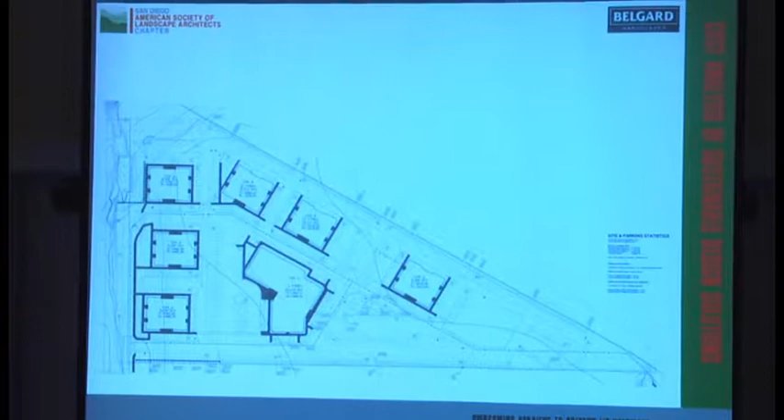And that project was this project. We thought, if we can take this project that was designed with very traditional methods, traditional materials, traditional approach to addressing stormwater management, and put together a group of people to look at it in a different way, maybe we can come up with a better argument.

So in October, the Stewardship Committee put on a really fun, interesting event - probably the most fun any of us have ever had. We put on a charrette, a design charrette.

We put on a design charrette where we invited landscape architects, civil engineers, landscape contractors, and landscape architecture students to gather together, similar to what we're doing today, except in a different venue. We broke up into 5 teams, each with at least one person from every discipline, and had this brainstorming design session.

Out of that came some slides that I'm going to show you. It was actually very interesting, the solutions they came up with.

We looked at the best designs. By the way, they only had about 3 hours to come up with this design. This project is about 11 acres and has 7 buildings on it - just thought I'd count them out for you in case you couldn't see it.

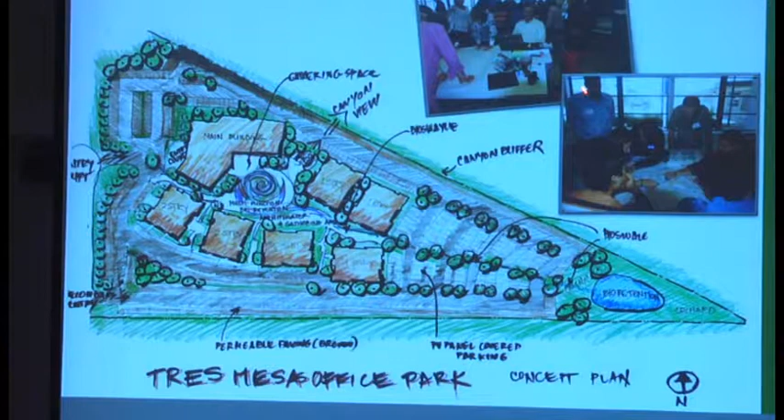And here are some photographs that give you the thrilling experience that we had. One of the designs - they all had interesting solutions. These were all done with manual drafting tools - I'm kidding, it was all freehand.

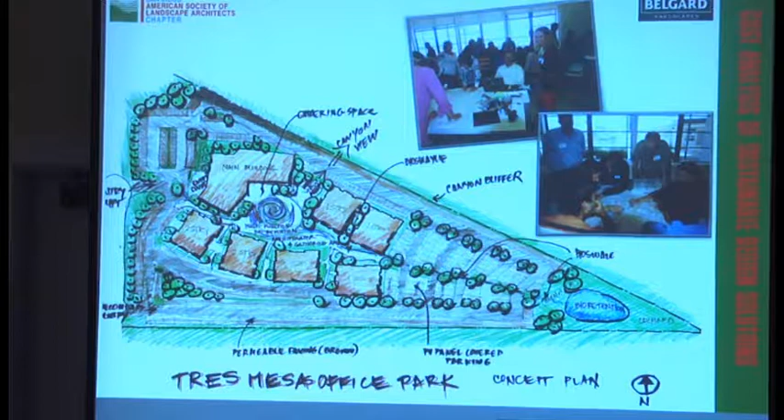They were just learning. Another project, we had 5 solutions. This is an image of one of the teams working on the design together. This is an image of that project being presented.

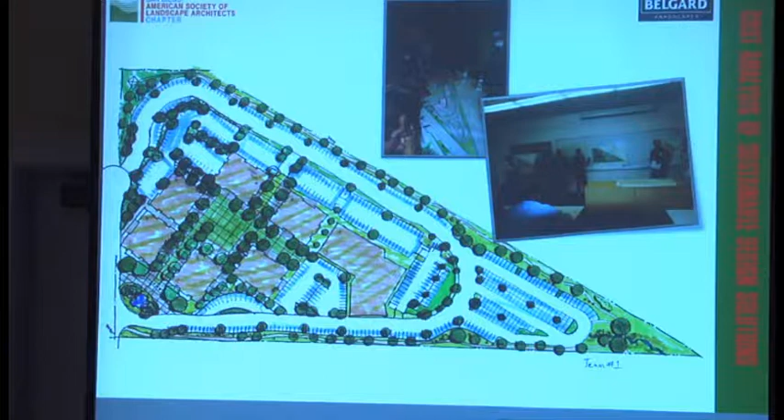We took out the slides that showed people fighting - there was a lot of that, it was a little embarrassing. Some of the solutions showed more detention basins than others.

Oh, I'm going the wrong way.

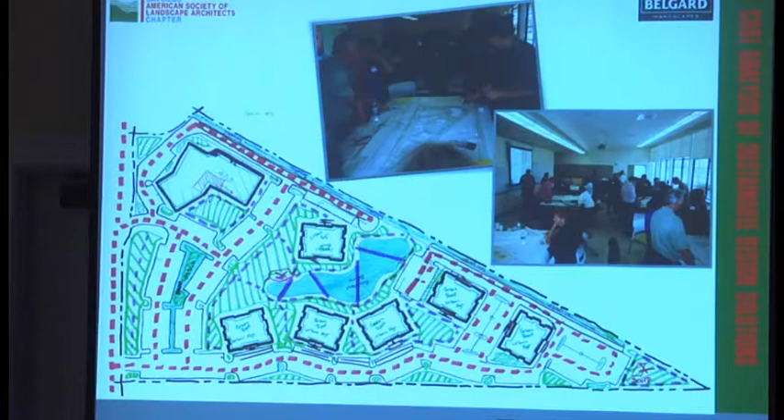This particular project, which is the one most similar to what we ended up going with, had permeable pavers going through the courtyards, creating a nice little space between the buildings, and going across, taking the water into this bioswale here and to a larger pond there. From these, we came up with this design.

I'll interrupt myself for a second to tell you that this study we're doing is just the beginning of many cost analysis studies. Because we're going to look at so many different aspects of sustainable return on investment, we thought we'd break it up into manageable increments so we could get the information out to everybody. So we looked at paving.

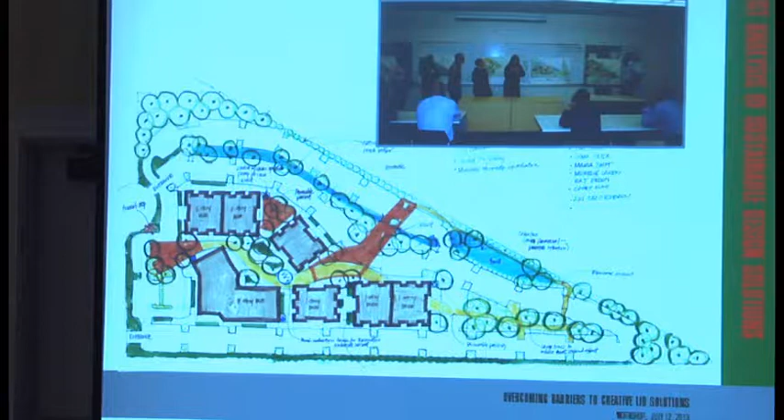Much like today, Belgard helped support that event. They gave a nice lecture at lunchtime, and after hearing everybody's presentations, they shared what could be done if the whole project had been done with permeable pavement. Remember this project here - I'm not picking on it, because it was actually the one closest to what we went with - but most people thought permeable pavers are more expensive than concrete or asphalt, so we need to use them sparingly. You'll find in the rest of my presentation that's actually not the case in many cases.

So they showed us that we might want to look at using permeable paving on the entire parking lot. I'll point out that as everybody was quickly developing their plans, they quickly discovered in that 3-hour design period how much the parking dictates the entire project, if they didn't know it already. Some of the projects didn't meet the parking requirement - they were really nice designs, but they fell a little bit short, so we couldn't use those.

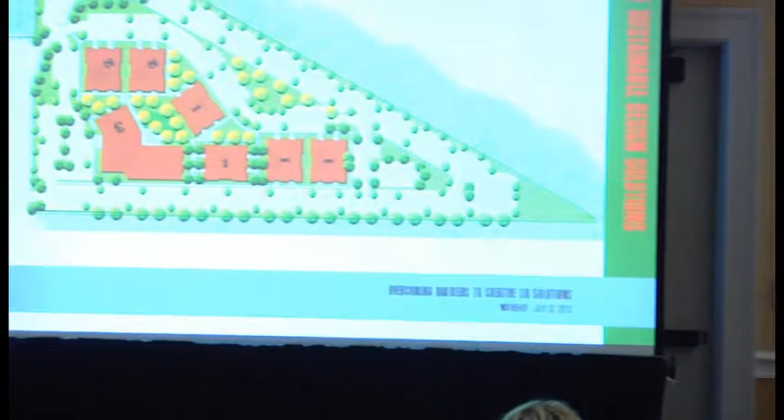So this project here, clearly from a sustainability point of view - and this was not just about cost analysis. I think we all know sustainability is about not only economics, but also the environment and social well-being. Part of social well-being is how do we create spaces that bring people together, spaces that allow people to appreciate the landscape? So this and some of the other designs created a nice little courtyard in here. Even if you have to park down here, well, at least you get a little bit of exercise and can walk through a nice landscape.

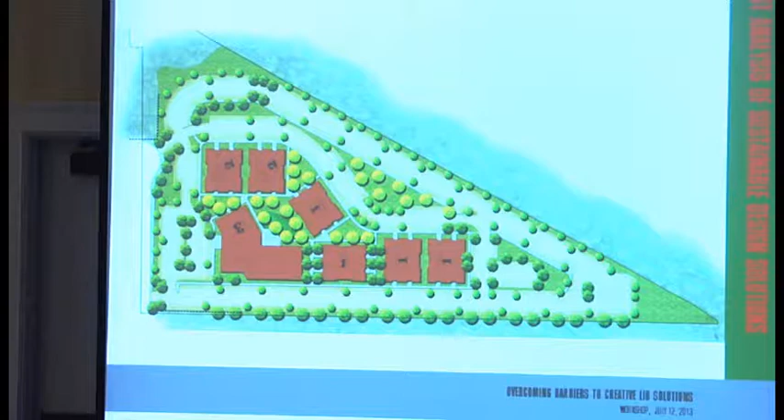So with that, I'd like to talk about the numbers. One of the reasons I'm presenting right now, right after the break, is because the next 4 slides are just numbers, and I was afraid you'd fall asleep if I put this at the very end.

So remember when I said I could cry easily? If I see somebody sleeping, man, don't do that. It'll just send me over the edge. So I'm not going to bore you with all the details, but on this one I want to go over each line item.

The first line item is asphalt paving and curb and gutter and the ribbon gutter. So you'll see we have a unit cost of about $4.65.

I'm going to interrupt myself again because I forgot to say something important. Putting these numbers together, we worked with Seth Seaton from Belgard and John Coffey from Coffey Engineering to put some of these numbers together.

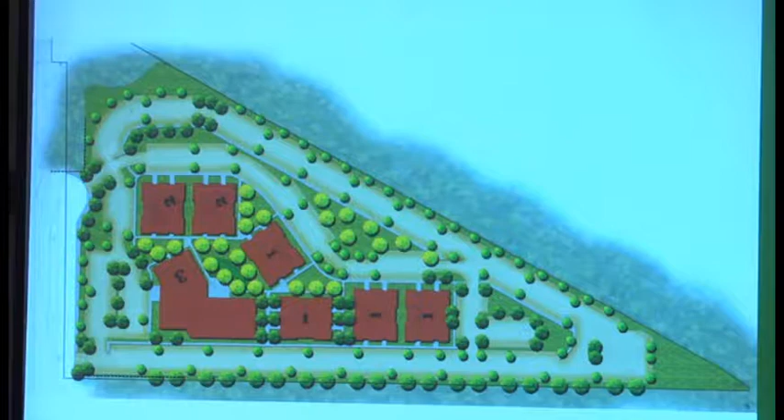I bring that up because how many of us, especially the landscape architects, wish that we could be involved in the project earlier on and brainstorm with the civil engineer before they get too far down the path of no return, because they don't want to redo the design based on our comments. The client doesn't want to pay them to redo it. We don't want to point it out to the client that we think it could be done a little bit better, right or wrong, because we don't want to make the civil look bad. And the civil doesn't want to make us look bad. So if we're all together in the beginning, it will make a much better project. And even though the client may think that it...

Thank you. I think everybody in here would agree, but I don't know how many... Do we have any developers here? We did invite some. Dang, I was really hoping they'd hear that, especially the applause.

But we need to get the word out. So you civils that get hired right away, when you're talking to your client, talk to them about how valuable the landscape architects would be coming to the table right away, and how it might be more money in the very beginning. I've already diverted from my presentation, but I do that anyway because I've got the microphone—it takes longer for you guys to shut me up. But we think it will save the client more money in the long run. It's going to be more money in the beginning, but not only will it save them money, we think it'll be a more creative solution. I'm not discounting the civils—they have much better knowledge than we do of the technical aspects, but we need to be working together.

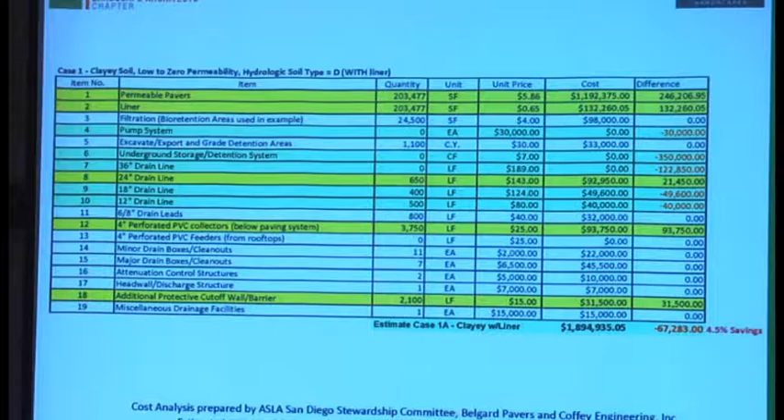Before I go over these details, I want to point out the reason we've done this: we're going to have this on our website. We want it to be a place for everybody here, anyone in the country or the world, to go look at a scenario that might closely resemble what they're dealing with.

We understand that some of the line items on these spreadsheets may not apply to your project, but it's a general checklist of things to think about. On your project, if you see similar things, you can latch on to those. The things that are different, you'll understand how to interpret. One benefit is it gives you a head start in thinking about it.

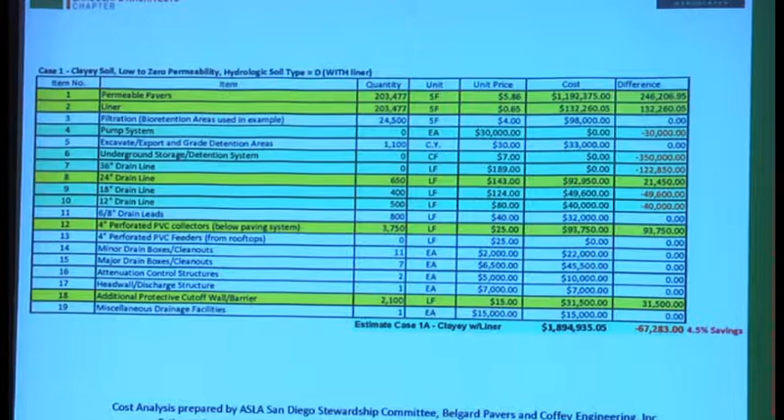Is it worth taking the time, especially with whatever fee you've been given, to look at the viability of permeable pavers or permeable pavement? Pavers aren't always the answer, but is it worth spending that time? I think you get the idea.

I want to say again, I can take the criticism. If you want to critique the heck out of this, we would actually welcome it.

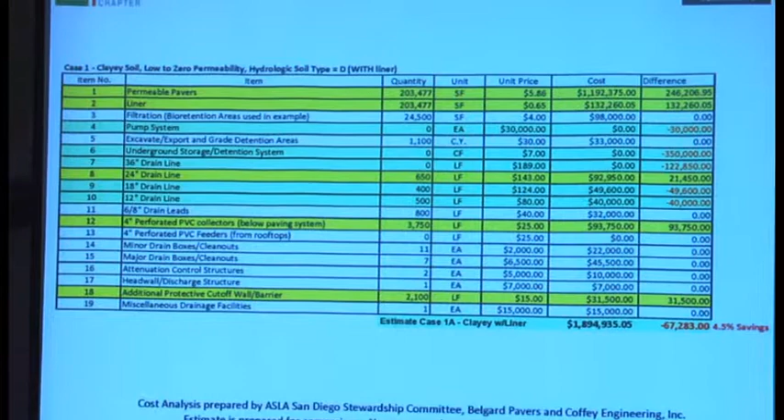On the next three slides, you'll see rows of green, yellow, and white. The white rows didn't change at all. The yellow rows are numbers that went up compared to the asphalt parking lot. The green rows with red numbers, and the total, went down.

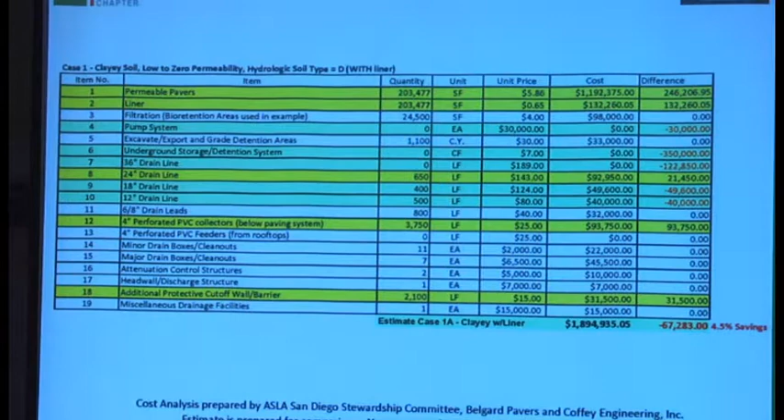I picked green just for green sustainability. I thought that was incredibly clever of me. I shared that with my wife, and she agreed, so I know it's true. And subconsciously, didn't realize until Sharon May pointed out, it's dollars saved.

So if we look at the first line item, the parking lot asphalt, curb, gutter, and ribbon gutter, that was $946,000. I also need to point out the asterisk at the bottom: that cost of $4.65 is the asphalt, but also the curb, gutter, and ribbon gutter beyond what would have been installed for a permeable pavement parking lot.

So there will be some curb in the permeable pavement, but we don't need a gutter. The gutter is usually used, in case you don't know, to convey the water to another place. Well, we're going to be sending the water below the pavement, so we don't need that gutter. We also don't need the ribbon gutter.

However, the cost went up to over $1 million, and the difference was $246,000. Now, what happens very often when you're talking to the client about using permeable pavers or some other sustainable material, they'll say, well, that's a lot more expensive. Why would I do that?

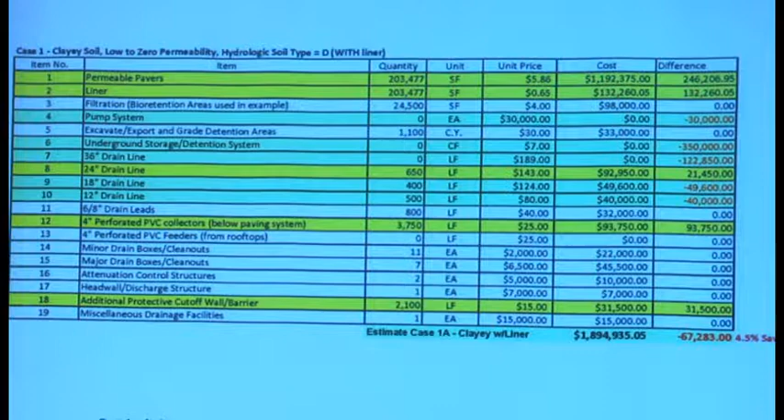However, we've also gone up in price because now we have to add the 4-inch perforated PVC collectors, and we also have additional protective cutoff wall barriers. However, with all the additional numbers, because we've reduced some of the other things, we have already reduced it by 4.5% under clay soil conditions.

So that's pretty good. This doesn't even address the fact that now the owner of this project doesn't have to come back in 4 or 5 years to reseal the asphalt. What if this number had been higher? What if we still weren't saving money?

I would contend that the client would still save money in 4 or 5 years because now they don't have to reseal this product, the pavers. At about, I think it's about $1.25 to reseal it. That would have made up the difference right there. So we're looking pretty good now, and now we've got a really cool parking lot.

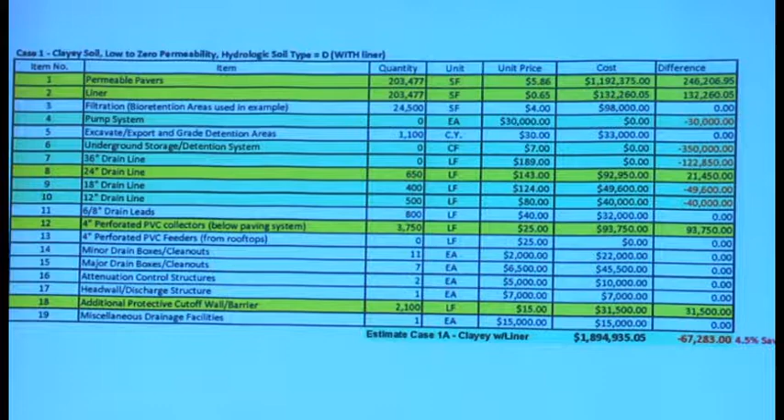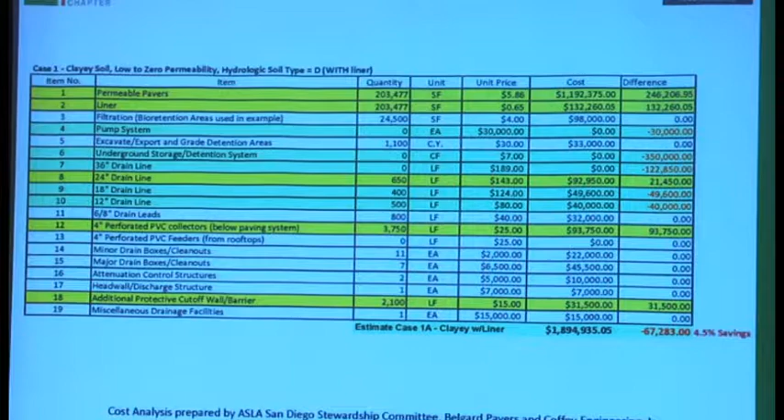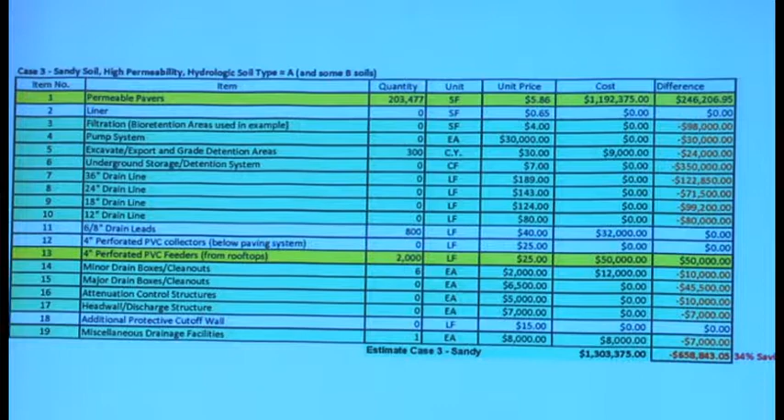Basically, I'm proving that I can count. But we have a lot more numbers, a lot more line items that are affected by this in the positive direction, positive as in saving money. And then finally, the sandy soils, the savings is huge. Now, of course, in San Diego, we don't have that many opportunities to take advantage of that, but we do have some. And this is really an easy argument to make, assuming that our numbers are correct.

So now I have to refer to my notes to make sure I haven't forgotten anything.

I'd like to point out that some of the other savings by using the permeable pavers, beyond the fact that we don't have to seal it later on, if you have to make a repair, it's easy. You just pull out some of the pavers and replace it. How many times have we seen parking lots where you see that ugly extra black fluid? Somebody in here knows the name of that stuff, that sealer that fills in the cracks. And after enough rain, the asphalt starts to break up, and you've got these patches all over the place.

And then the only place you're left with attractive paving is maybe some of that, quote, special paving, the accent at the entrance or the entrance to the building. Now with permeable pavers, as a viable solution to the design, we can do some nice detail at the entryways, maybe have a simpler thing.

I have less than a minute left before I entertain questions, but I'd like to remind everybody that this used permeable pavers over the entire parking lot. A lot of us have seen permeable pavers used in parking lots. For some reason, people are using it in the parking spaces, and then they're using concrete or asphalt in the drive aisles, because there's thought that you need that for the structural stability, for fire trucks, for example, or dump trucks.

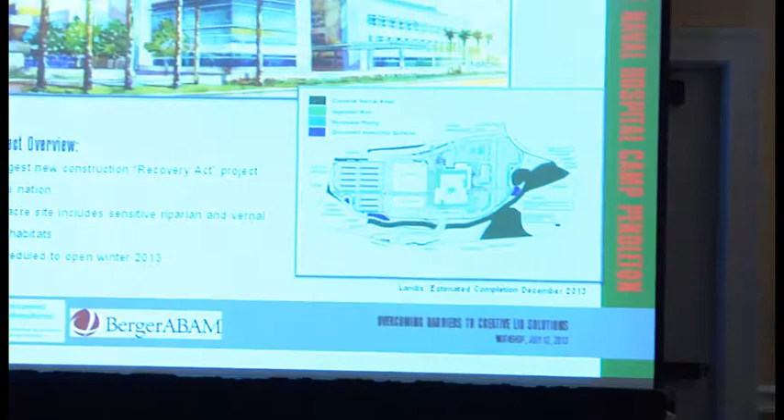I wanted to comment a little bit on what Tim brought up - we like to be involved early on in the process. Sometimes we're kind of, as landscape architects, at the end where we are delegated planting and irrigation and don't have a say in the site plan. This was an unusual project in that we were given a design, but the military had put a rider in that the landscape architects needed to basically redesign the whole site. So certain elements, the building couldn't move, some of the detention areas could not move, but the site was all open for play. We had the support of our civil engineers saying, okay, everybody else is at 65%, we're going to start over. So there were some tough moments there, but I think we've got a really great project, with some really wonderful low-impact development elements that include conserving our natural areas, some vegetated roofs, permeable paving, and disconnecting some of our impervious surfaces.

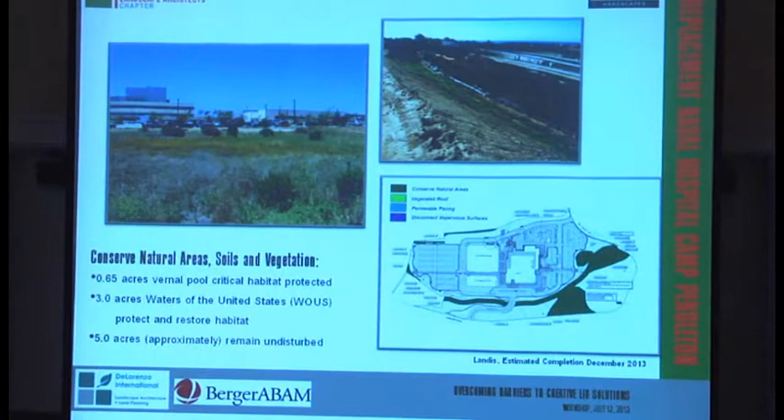So I'm going to talk a little bit about conserving our natural areas. We had 0.65 acres of vernal pool, and you can see this picture with the blue sky is the vernal pool taken a couple weeks ago, so it has survived the construction process. Also we have the Waters of the U.S. channel running right through the site. So this was a team effort with our civil engineers to minimize grading, but also a real team effort with our contractors to preserve those areas and make sure their people stayed out. At every safety meeting they held every day, they talked about how you cannot go in there, you cannot play around in there, you cannot eat lunch in there, there's animals in there, and they did a great job helping everybody understand that we needed to stay out of that area.

We have 3 acres of the Waters of the U.S. that is protected and restored, and about 5 acres we had planned for a larger area in the lower right-hand corner there. They've since developed a helipad landing there, so that is a separate project.

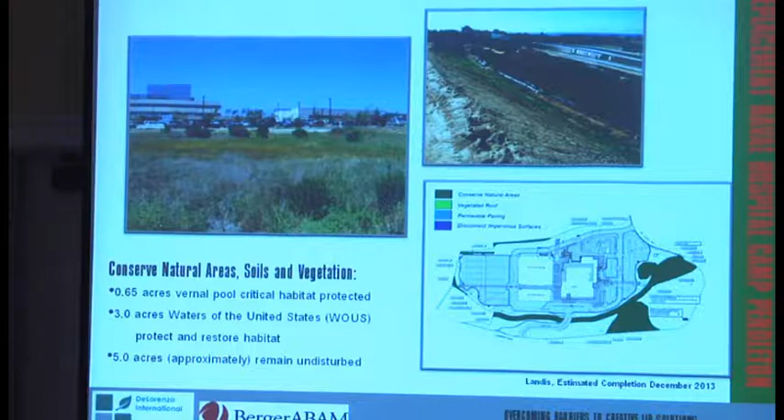And then we have a vegetated roof. So I hear a lot of people talk about how vegetated roofs aren't truly sustainable in an arid climate. And I would agree that there are significant challenges to vegetated roofs in an arid climate.

Again, partnering closely with our MEP team and our structural team, we overcame a lot of challenges with the vegetated roof that we inherited. We have about 1.5 acres of total vegetated roofs. And I think what's unique about this project is we're using them to hold some of the water on site, provide maybe some small habitat areas.

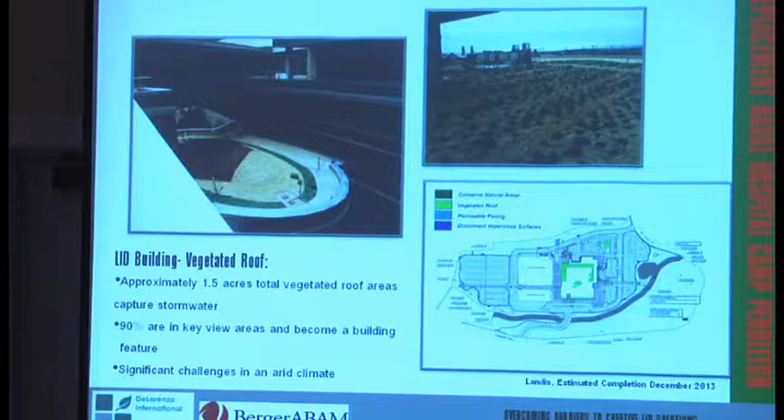I did see pollinators and bees up on the roof now that it's newly planted. But about 90% of the roofs are in key view areas. So we have lots of little segmented roofs and then a big, almost 1 acre roof at the very top of the building. But even in that very top roof, the top floor projects up through it.

So in this hospital, if you're in a waiting room or a patient's room, you look out and you see a green ground plane. And I think that's really important in a hospital environment. And it's maybe not the best low-impact development, certainly not the cheapest low-impact development measure, but I think there's a sustainable environment that it provides to people in the general area.

We've overcome a lot of challenges on this roof, having to do with soils, the water supply, the depth of the soils. Structure had already signed off on the building, so we are stuck with 4 inches of soil, which is a disaster in an arid climate.

So we've done a lot of work with our design build contractors to overcome some of those challenges. But all in all, it's newly in, it's growing well.

One unusual challenge that we did not anticipate is that with all the high efficiency glass going into the building, we call that the magnifying glass, and you can see where the big patch of rock is, 210 degrees in that location. So we could not plant our entire ellipse. It was actually melting the foam as our contractors were trying to install it. So we have decorative rock there now.

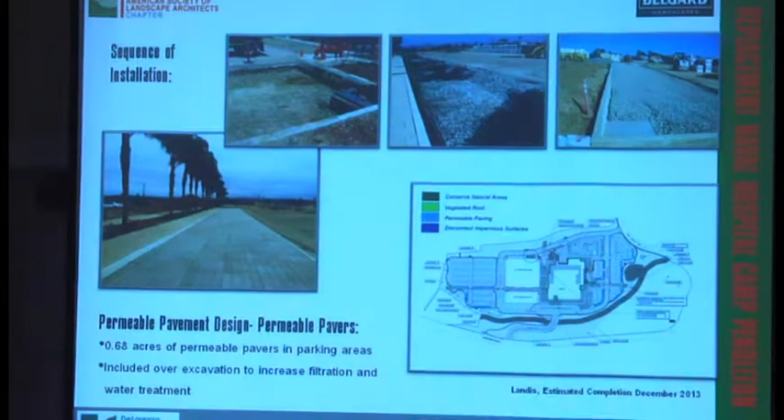So it is, yes. And because I teach at Southwestern, I'm always trying to document things for my students because I want them to understand it's not just about this surface pretty colored brick that you pick out of a catalog with a little swatch, but what happens underneath.

And we have pretty poor drainage on this site. And I don't know if you want to run through some of this. Sure. So we were putting the permeable pavers sort of around the perimeter of the site where things would drain towards them for the most part.

In these pictures that Michelle took, you can see the subsection being prepared and the rock being installed, and maybe we could have used permeable pavers throughout the parking lot, but we just have them around the edge here. And then on the lower left, you can kind of see what the finished product looked like.

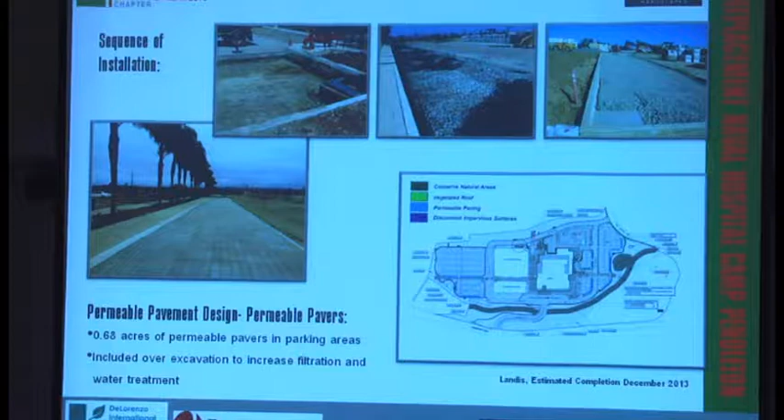Shall we move on? Well, and so I think at the end of the day, this was a very close relationship with Civil, and these details went back and forth. So we picked out the pretty pavers at the top, and we were working closely with them on the underlying system and making sure that it was all cohesive. We have like 0.6 acres of permeable pavers here.

Yeah, and before you move on, another thing here is this is class type D soil, so we didn't have an opportunity to infiltrate with anything. We were definitely needing to line it and redirect flow to the waters of the U.S., well, not the vernal pool, but the waters of the U.S.

And then I see we have our little end thing. So real quickly, the last thing is we're intercepting our impermeable surfaces and redirecting. You know, Civil said, why do we have trees in our bioswales?

So we had to work very closely to accommodate that condition, pass some of those details and specifications back and forth. Yes. So we went back and forth with locating the trees and the lighting and the underground storm drain system so they weren't conflicting with each other, and the curb lines and so forth.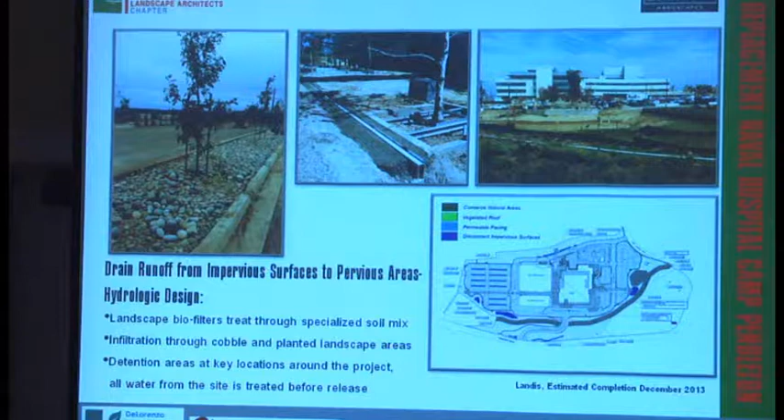So that was nice to have those conversations before we were in front of the client and kind of get the aha moment, not with the whole team, but just amongst ourselves beforehand. Yeah, and hopefully you get a chance to see it. It'll have some great kind of details in there.

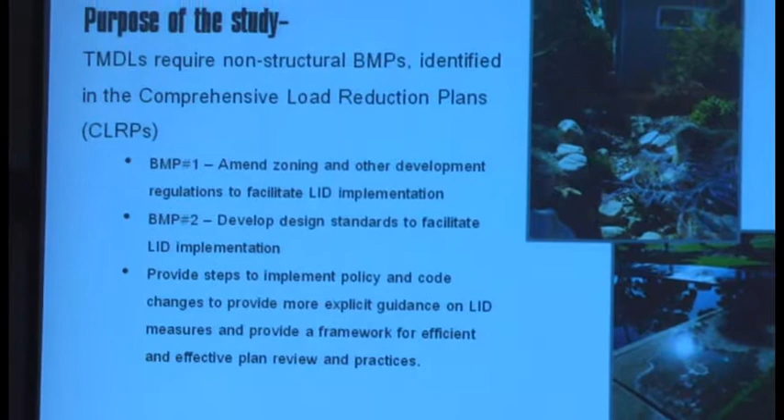All right, so the purpose of this study, really the main driver behind it for the city, is the establishment of TMDLs in the various water bodies. This has led to the creation of the comprehensive load reduction plans, which are created to help the city and the other jurisdictions achieve compliance. The CLRPs identify two non-structural BMPs to facilitate LID implementation, which is what this project was focused on.

And the big thing for this project was amending zoning and other development regulations. URS worked with the city to provide the steps to implement policy and code changes, to provide more guidance on the LID measures, and to provide the framework for efficient and effective plan review and practices.

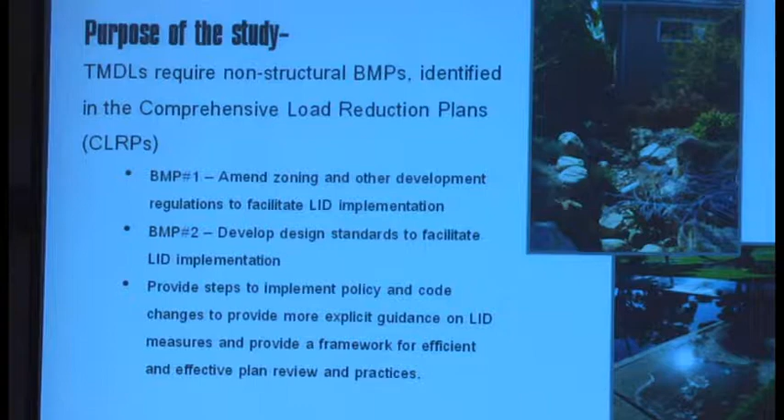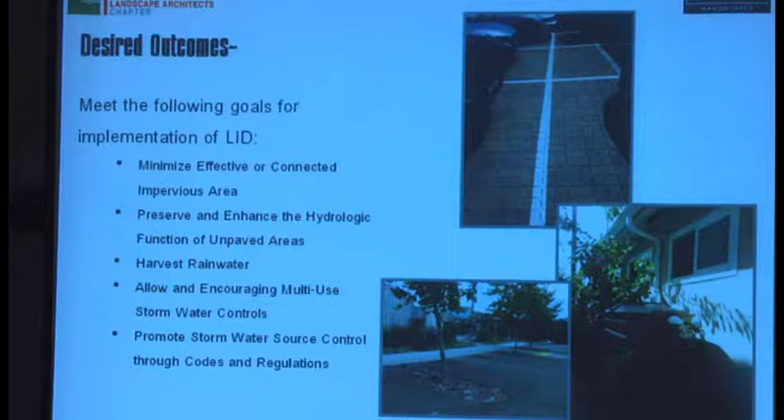The desired outcomes of these changes to policy and other regulations is to meet the following LID goals: to minimize effective or connected impervious areas, to preserve and enhance the hydrologic function of the unpaved areas, to harvest rainwater, to allow and encourage multi-use stormwater controls, and to promote stormwater source control through the codes and regulations. And now Patricia is going to give a little more detail on the implementation strategy.

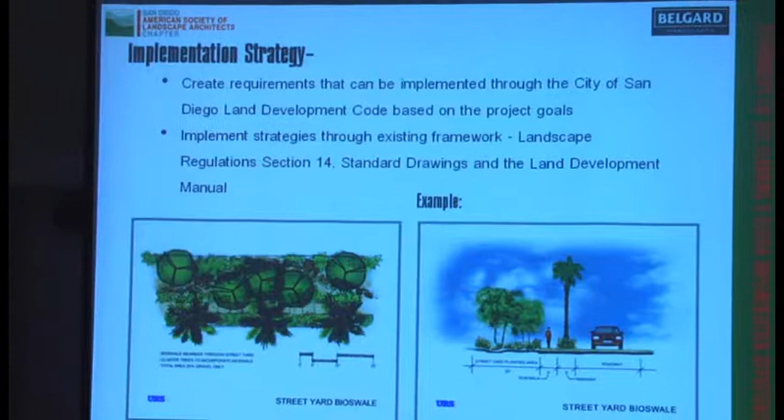As far as the implementation strategy, we're talking about using the framework the city has in place currently. We're not creating yet another document that you need to compile and address. In the prioritization, some of the items we're looking at more closely initially are the regional standard drawings, and also the landscape section.

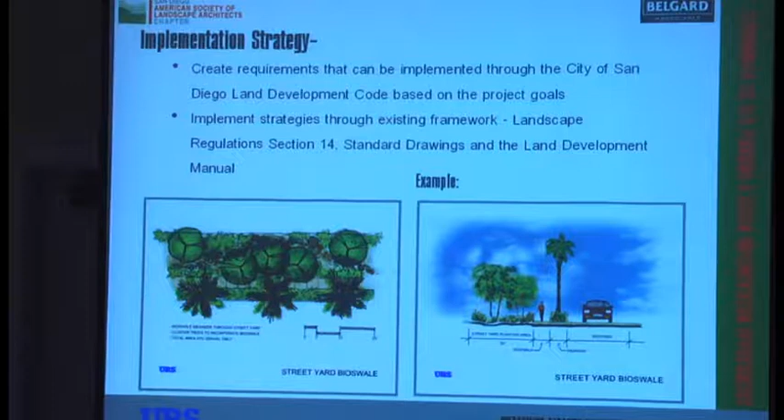We want to take a proactive approach. We're not very far along in this, so I can't say a whole lot, but one of the things we're going to try to do is, with the landscape regulations, you get points for doing different things, so what we'll be promoting is that you get points for implementing LID design concepts.

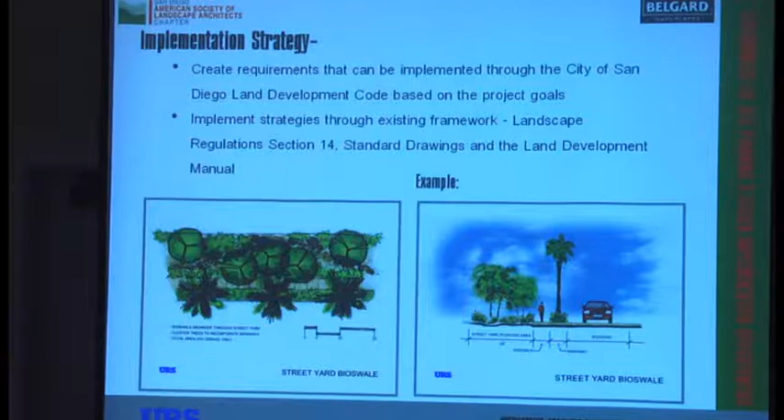So stay tuned. Now I want to turn this over to Kasia Trojanoska, and she's going to tell you about another one of our projects, the San Diego International Airport Terminal 2 expansion, and some of the LIDs we were able to implement.

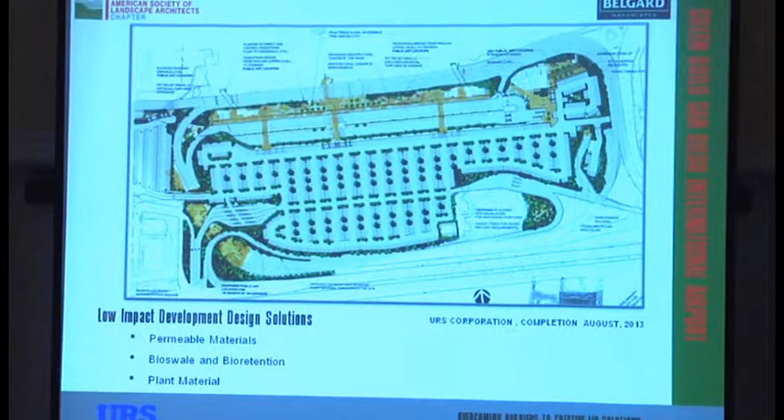I know we have very little time, so we're going to speed up through it. The Green Build San Diego International Airport project is the largest expansion in the history of the Airport Authority. It started in 2009 and will be open officially next month. The cost of the whole project, construction and design, was $1 billion, and the project was divided into two contracts.

Contract one was the construction of the terminal, and contract two the landside improvements. The Green Build contract two, where URS was lead designer, includes the elevated departure roadways, 2 pavilions, the brand new USO building and Transit Plaza, and also some sustainable landside improvements. The dual roadway will relieve curb traffic congestion by separating passengers associated with arrivals and departures.

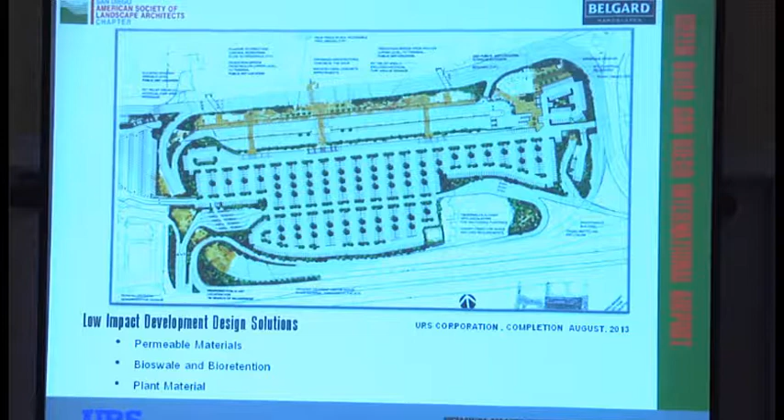The pavilions will allow passengers to check in, check their luggage, and print their boarding passes before even entering the terminal. The project is designed to achieve LEED Gold certification by using green design principles like natural ventilation, stormwater management, reduction of the heat island effect, as well as recycled materials.

And some renewable resources. The low-impact development solutions used on this project can be easily categorized into 3 groups: permeable materials, bioswale bioretention, and appropriate plant material. Nicole, give us highlights of those solutions that we used.

Okay, now we're going to fly through this because we already got the end sign. I think everybody here understands there are significant issues with implementing LID on a redevelopment project, especially one with as much paved surface as this one has.

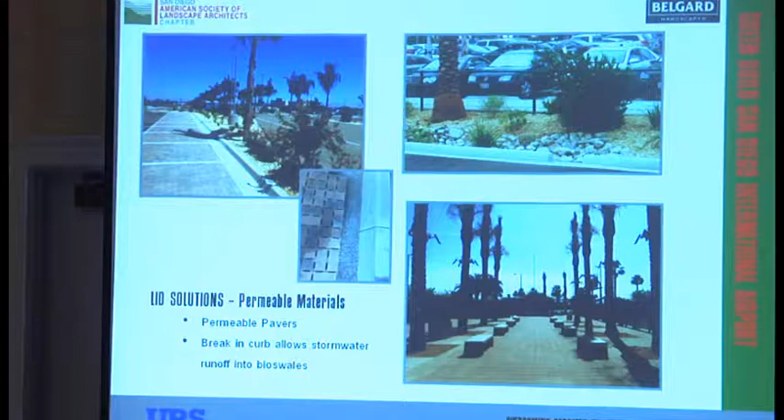The pavers were a big part of helping us meet the project goals, and we installed about 30,000 square feet of pavers in the parking lot, which has the capacity to infiltrate about 24,000 cubic feet of rainwater. Another technique we used was creating curb cuts in the curb along the Transit Plaza, allowing water to go into the vegetated areas and the swale without impacting traffic safety.

We also did at-grade curbs to encourage infiltration into the landscaped areas. It allowed the stormwater to run off and filter, and also supplement irrigation, while maximizing parking and pedestrian access.

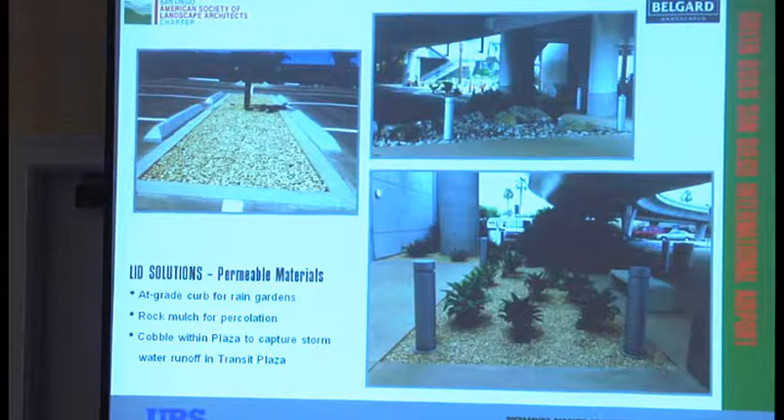We also used bioswales and bioretention, which you saw a bit on the last slide. Each was used based on the hydraulic conditions as well as the available area. In the bioretention areas, we were able to raise the grates up several inches to encourage infiltration, while also meeting all our flood control needs. Cobble was used along the main flow line to reduce stormwater velocities and provide erosion protection.

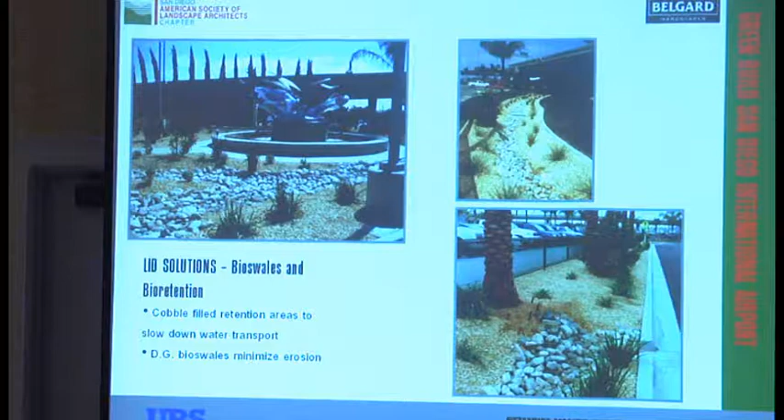We've got a few more examples of our bioswales and bioretention. Overall in the project we had 5 bioretention areas and 13 bioswales. Over 50% of the project area was treated by LID, which I was a little surprised to see when I found that number. We maximized the use everywhere we could, it was a team effort.

We still had to use some vault-type BMPs on site, but they were a much smaller size. It just proves that with early planning, LID solutions can help reduce the need for storm drain infrastructure, and can also be a cost-effective solution. Now Kasha's going to talk about plant materials.

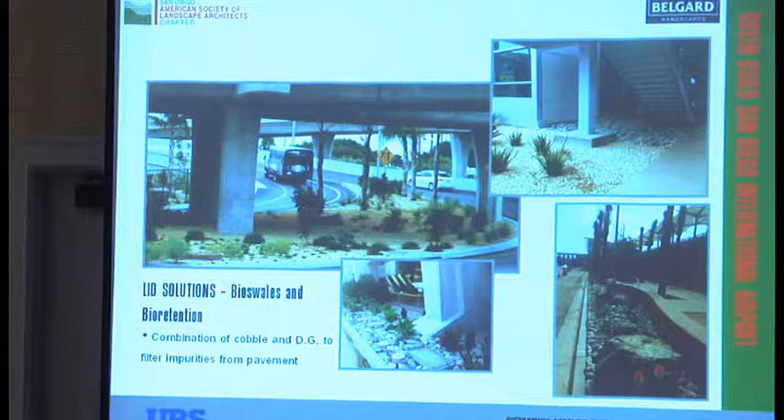There's just 2 more slides, I promise. Our plant material was very carefully selected for this project. We hope to, and I think we achieved, a very contemporary look while still blending with the existing environment, and we avoided turf for water demand. So we used informal clusters of drought-tolerant trees and shrubs.

The planting palette was also picked to support some environmental processes on the site. Some of those were water conservation and bioremediation by using the right plants in the bioswales and bioretention basins, erosion control, and heat island effect, especially on the parking lots where we finally were able to use some canopy trees, which was not the case from the very beginning.

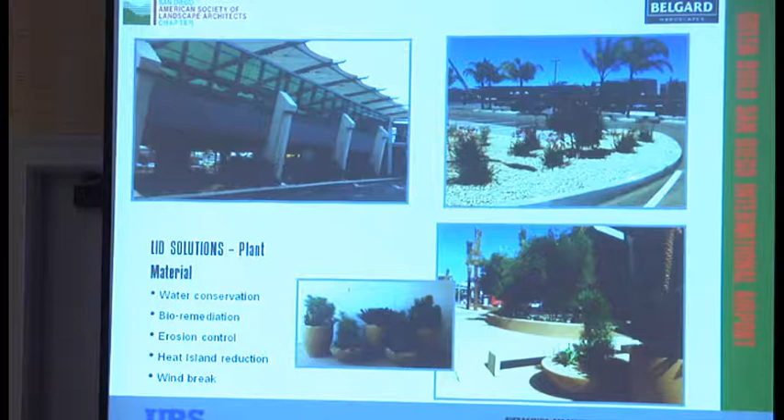We kind of had to have discussions about that. We use drip irrigation with some bubblers on the site, and this project is the largest drip installation in San Diego County. Together with the weather-based controller that self-adjusts the time the valves run, it creates a very efficient system in regards to water use.

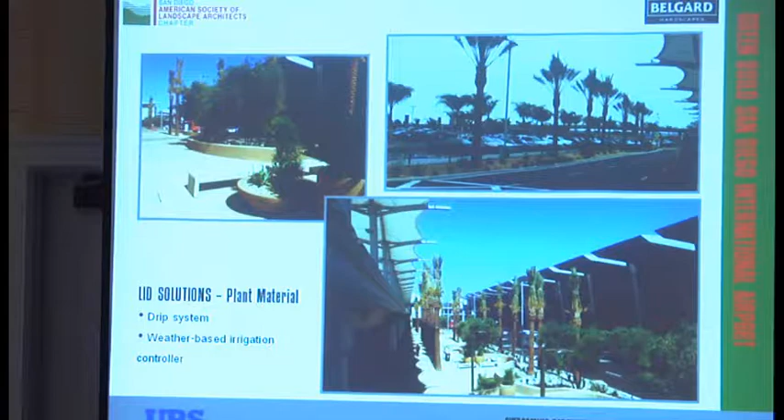You all need to zoom out. This is a different project. We don't have any shovel in the ground. This is at a conceptual level. We're just missing a little bit of funding and justification.

I want to point out that this is trying to be an integrated systems approach, which we all learned about in school, and integrated is always a better thing to do. I want to introduce a new acronym, which is Green Rights of Way. We would like to blow green streets and complete streets out of the water with a complete green rights of way.

Before I get into too much trouble, I certainly want to thank James, along with the city, for being the one encouraging, consistent source with the city. In working on this project, my engineers have not really stepped up because the funding was discontinued or put off for a little while, so we don't really have all the numbers, and I won't be competing with Jim about any numbers.

What we wanted to do as a park project, as all of us landscape architects wanted to do, in this integrated idea, was come up with an umbrella theme, the vision for the project, which is health. Certainly to all of us, that's like mom and apple pie, and health is very obvious, but it had to be the most fundamental component. Health personally, economically, culturally, and what we want to speak about today is environmentally, and how all of those things come together in this one downtown project.

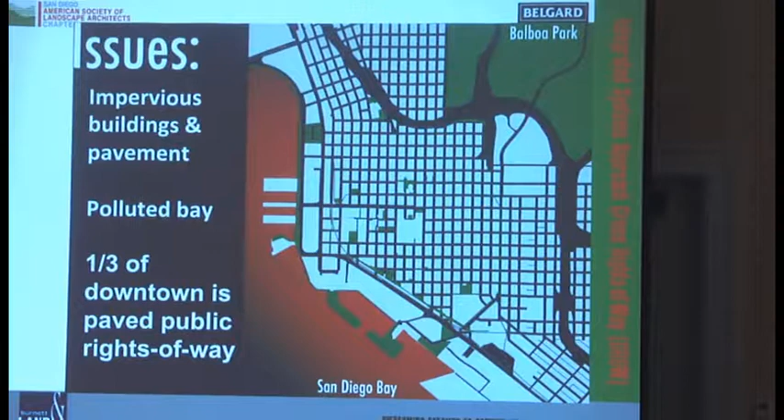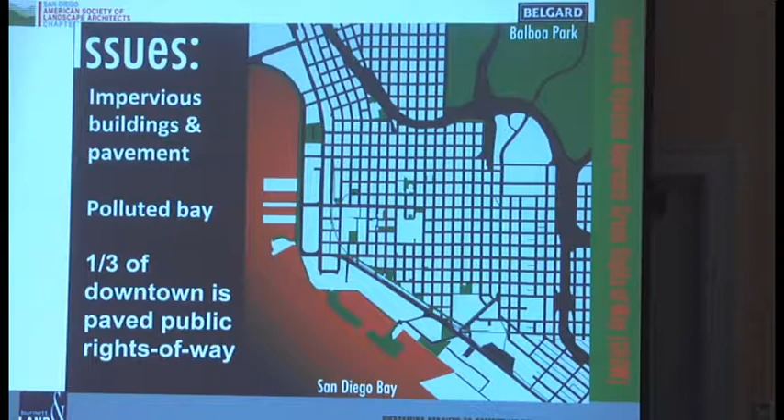But she brought up, or the question was brought up about stormwater and urban flushing in downtown and urban areas. I had read somewhere that San Diego Bay is maybe still the most polluted, or the second most polluted bay in the world, after somewhere in New Jersey. I'm not certain that's true, but it's a fun fact. It has everything to do with the Navy and painting of boats, but certainly urban runoff contributes significantly to that. How can a park system contribute to that?

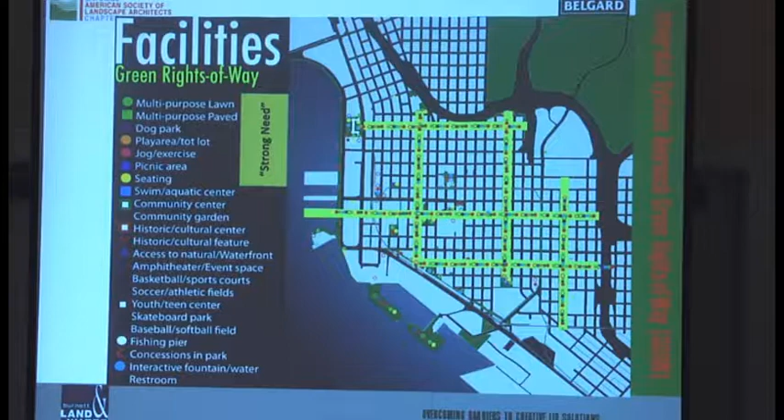What we did was come up with an idea that we're calling Green Rights of Way. I can't point out exactly where we are sitting right now, but many of you get the idea that there are these six streets that crisscross downtown San Diego, and in effect, adding typical park facilities to serve the needs of the residents and visitors. So let me describe what that means.

Another component of it, of course, is water pollution. One of our students, recent graduate Josh Sanders, discovered this from Weston, the pollutants that have been studied and how they figure into San Diego Bay. As you can see, this watershed area reaches up into North Park, through Balboa Park, and across downtown San Diego.

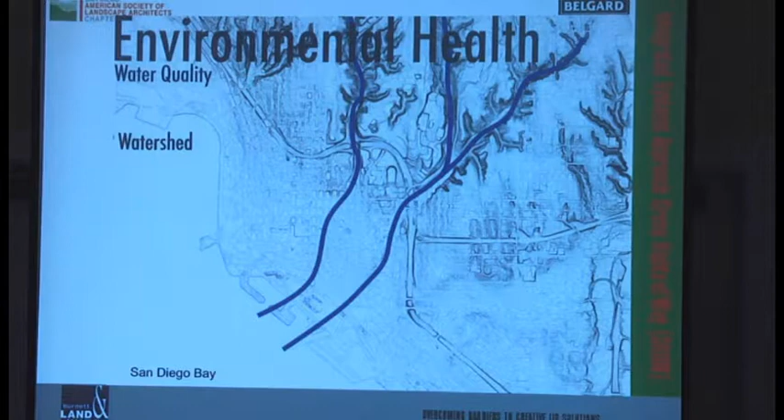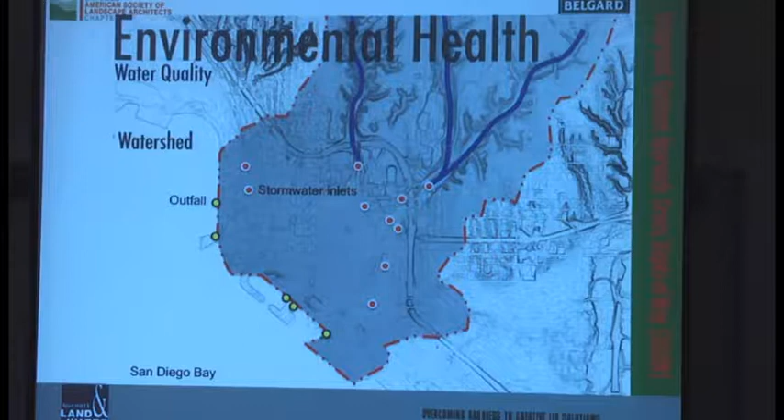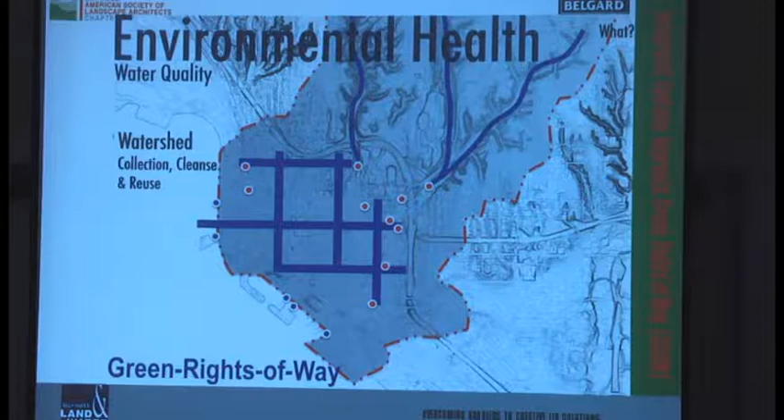And where it dumps into the bay, with the red dots and little yellow dots showing where the outfalls are. This idea of green rights-of-way, where these areas could actually pick up, collect stormwater, cleanse it, and reuse it before it's released back into the bay.

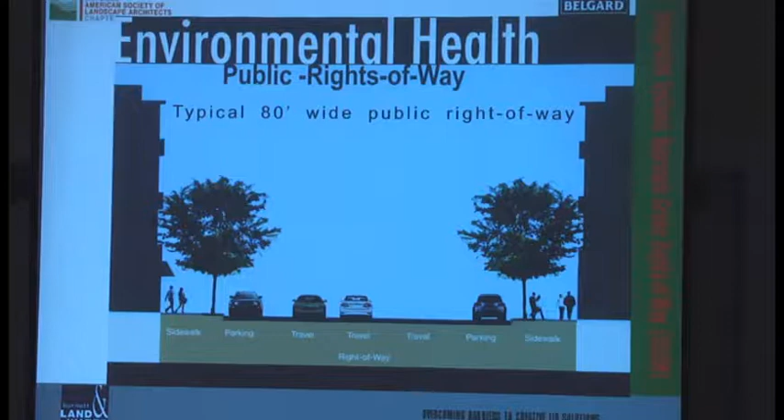So the idea of this green rights-of-way - typically our rights-of-way in downtown San Diego are 80 feet wide. When the Horton era set up downtown San Diego, all of the streets except for about three were typically 80-foot wide right-of-way - property we, the citizens of San Diego, own.

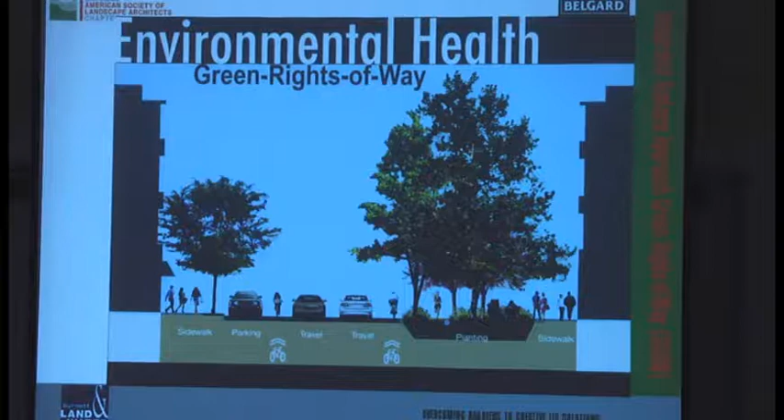The idea is, of those 6 streets that we pointed out in the earlier diagram, to take out about 32 feet and dig up the pavement, removing it in 20-some feet of that area. You'd still certainly have the parking, 2 travel lanes, bike lanes, but most importantly this large planting area where you could have typical park and public park facilities - jogging paths, small play areas for children, dog parks, all those sorts of things.

And the idea of how much stormwater could that collect. This is certainly where the engineers got busy and did other things besides working with me to really get you the numbers. So I come up with my own math, trying to devise and see what amount of water it's going to take, what sorts of things we can solve, and how we can get the right people's attention to make this into a real project.

So in my calculation, this system would be about 4 miles of parks and trails crisscrossing downtown, almost 10 to 16 acres of parkland. Using a structural soil, looking at the porosity and that sort of thing, you can do some back-of-the-napkin math and come up with significant amounts of stormwater that can be collected. I haven't exactly figured out what the stormwater is that comes across that area, but with these numbers - 750,000 cubic feet of stormwater - is that enough to get your attention to start doing something with that?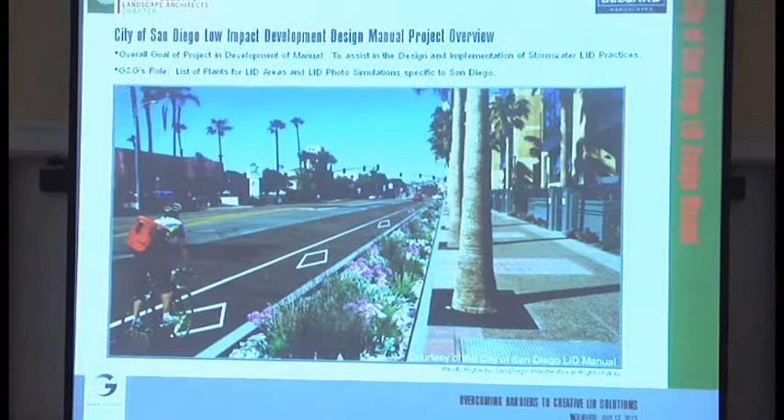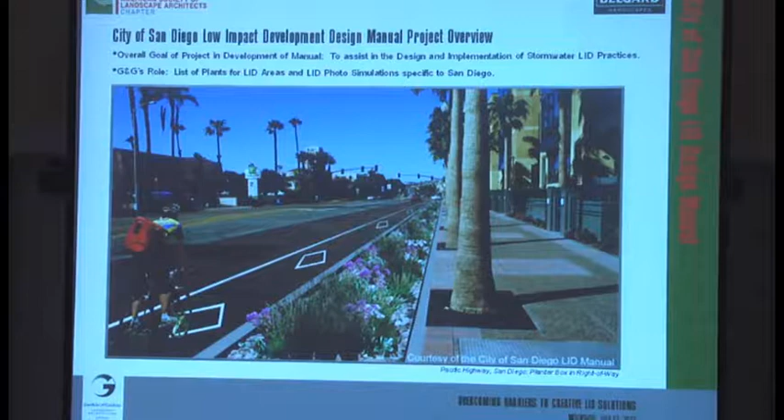The overall goal of the manual is to assist in design and implementation of stormwater LID practices. Our role was to create a matrix for LID areas and to create photo simulations specific to San Diego. The image you see up there is here in San Diego on Pacific Highway, showing a bioretention area along the right-of-way, and plants from the list created in the design manual.

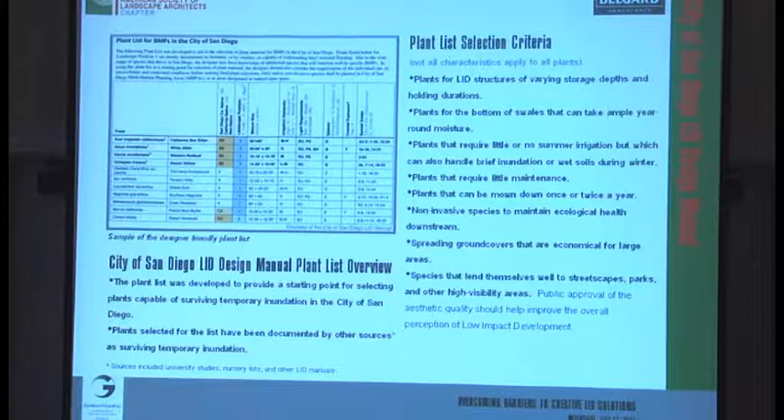For the plant list for the City of San Diego, it was basically developed to provide a starting point for selecting plants capable of surviving temporary inundation or flooding in the City of San Diego. Plants selected for the list have been documented by other sources as surviving temporary flooding. Sources included university studies, nursery lists, and other LID manuals throughout the U.S., and many hours my colleague Mike spent with the biologists of the city of San Diego. Based on the research done for this criteria, there's a list - sorry.

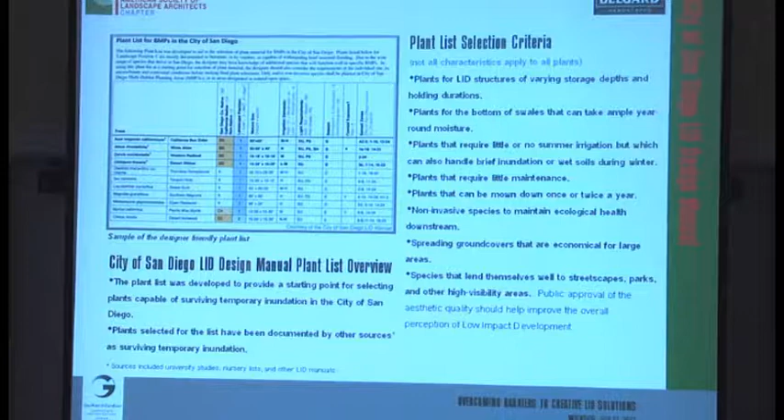Plants for LID structures of varying storage depths and holding durations. Plants for bottom of swales that can take ample year-round moisture. Plants that require little or no irrigation but can handle brief inundations or wet soils during winter. Plants that require little maintenance. Plants that can be mown down once or twice a year. Non-invasive species that maintain ecological health downstream. Spreading ground covers that are economical for large areas. Also species that lend themselves well to streetscapes, parks, and other high visibility areas - public approval of the aesthetic quality should help improve the overall perception of low impact development. This is the criteria used in all three designs for all three projects.

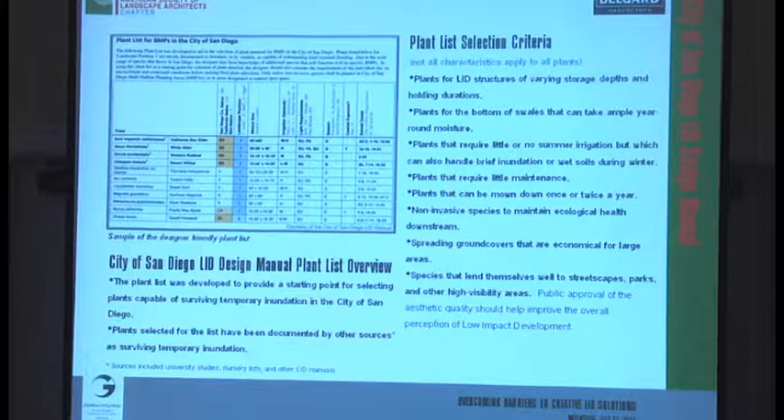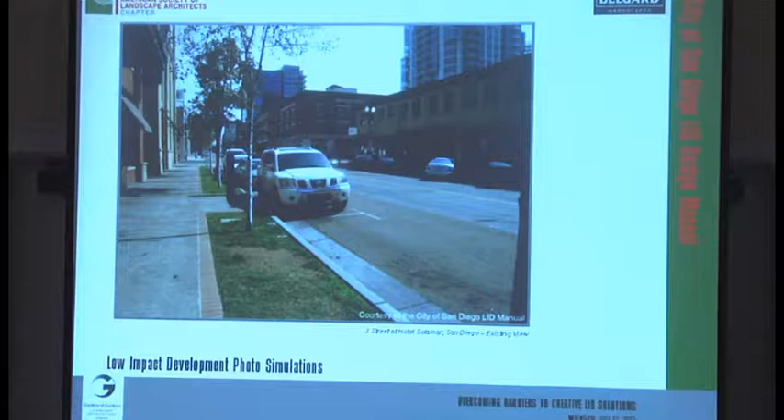On to the next slide, you'll possibly notice this is right here outside of the hotel on J Street. It's an existing view there. The next slide is a photo simulation of what could be done, showing permeable pavement, pedestrian strip, and a curb cut into the bioretention areas. You'll notice it's slightly enhanced with the verticality of the photo simulation.

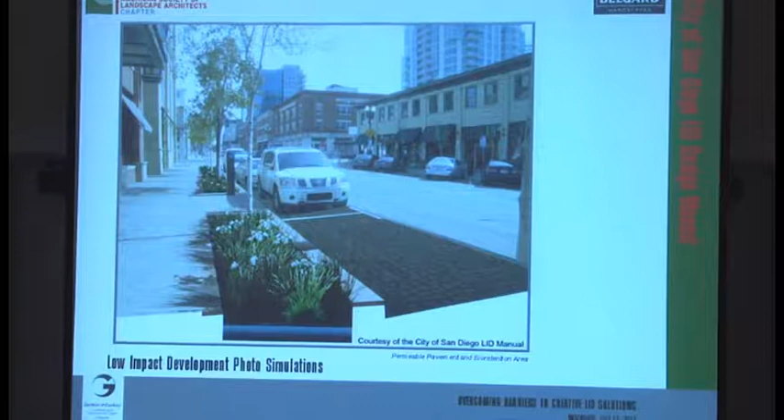On to the next slide is the next project with the City of San Diego. Four diverse locations were chosen by Tetra Tech and the city to illustrate different LID configurations, and we've developed the photo simulations for those specific sites. Plant lists were also developed for each site. The designs will aid staff to determine future LID strategies and possible pilot projects.

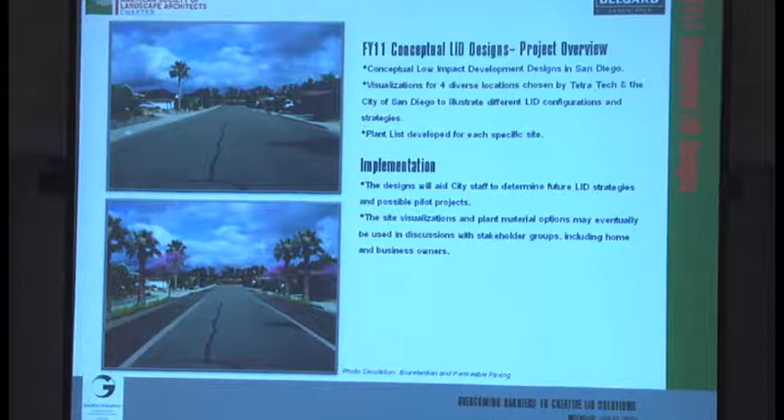On to the next slide is the last project I'll be speaking about, the Bannock Avenue neighborhood streetscapes, which is, I just found out, a pilot project for the city of San Diego, and it was just awarded a bid. That's good news. The project is located in a residential neighborhood in Clairemont Mesa. The stormwater area drains into Tecolote Canyon and is part of the Mission Bay watershed.

The city and prime consultant Tetra Tech studied the area and located potential streetscapes within the vicinity of Bannock Avenue. We developed three thematic options for different streetscapes. The city and Tetra Tech narrowed locations and developed a process for homeowner involvement. We developed three separate themes.

Theme A is basically an informal planting parkway with intermittent LID-approved plantings arranged in an informal pattern. It was originally called Cobblestone and Planting Parkways.

Theme B was regenerative low grass parkways, LID-approved grasses that spread by rhizomes and stolons to refill damaged areas, possibly in the retention areas, that don't require much mowing and which are either locally native or don't produce seed.

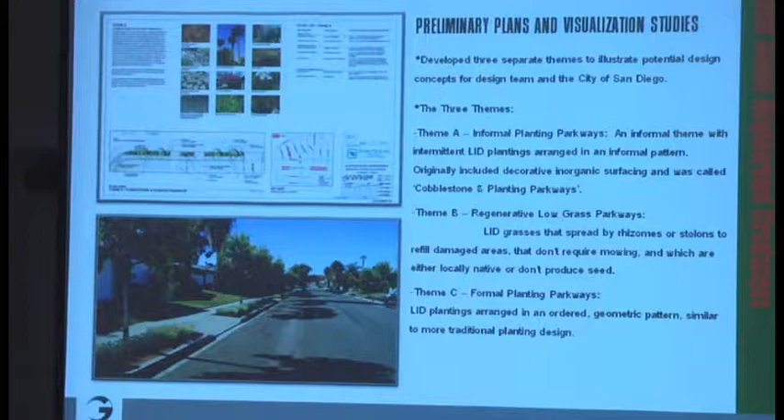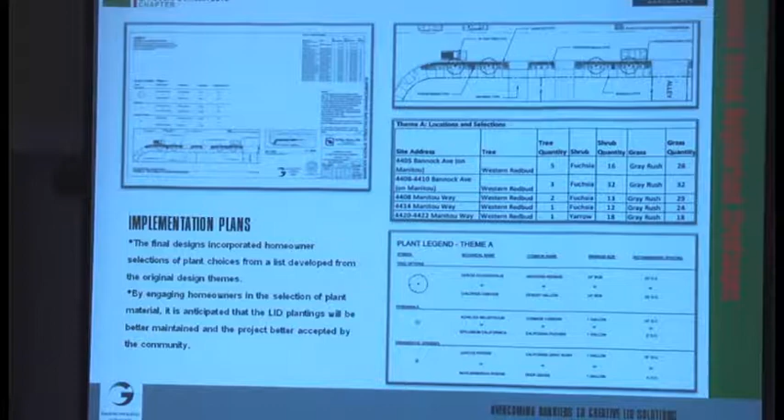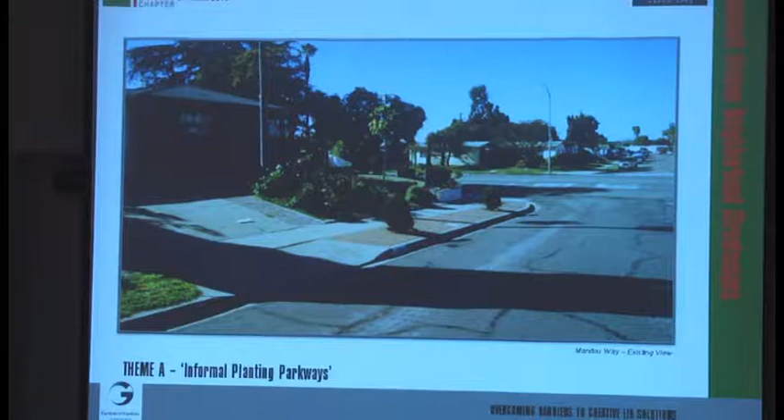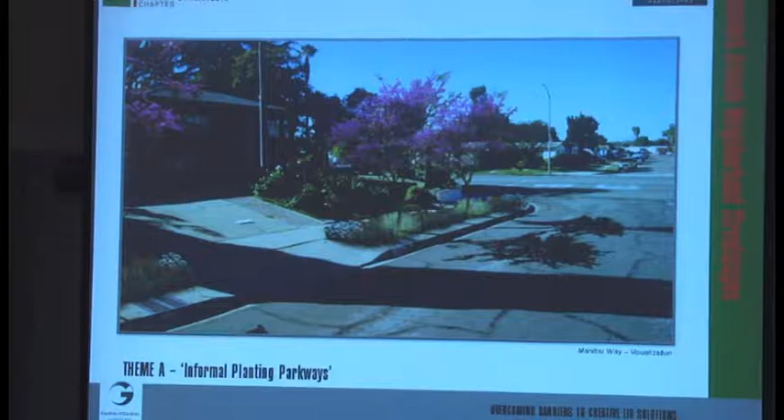This is an existing view on Manitou Way for the Bannock project, showing the existing parkway there. And this next slide is a photo simulation, again showing curb cuts into the bioretention and the appropriate LID-approved plantings. And that is the end of the presentation.